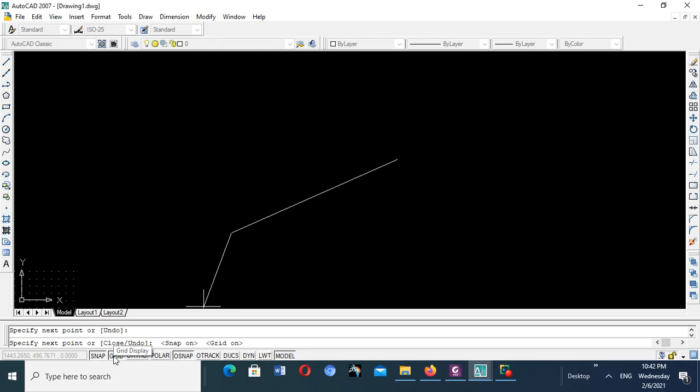Then after the coordinate display, there is what we call the status bar, which is this one. You know, snap on, grid on, off. See, grid — there's a grid already there, activated, grid deactivated, ortho on, ortho off. If you put ortho on, you can only draw horizontal and vertical lines. If you put ortho off, you can draw a line at any inclination.

Then polar, when you want to draw a line using angle as one of the parameters of description. Then osnap helps you to identify a point easily. When osnap is off, it doesn't tell you where you are, but when osnap is on, it approximates the position where you are. So it must be on. Then there's otrack, dynamic, lineweight, model — all those are your status bar items.

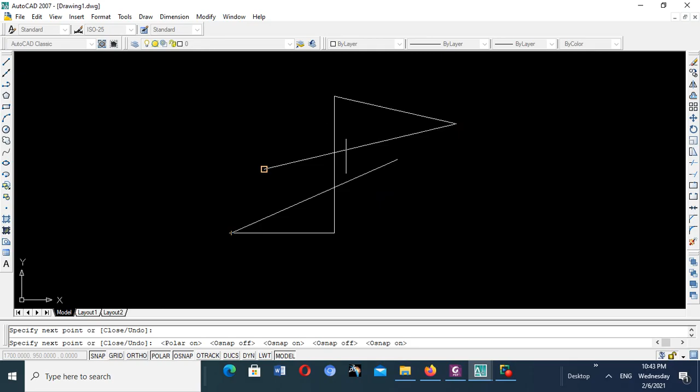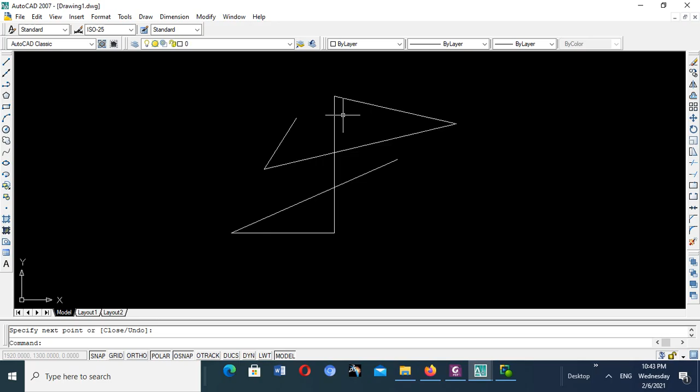Then we want to give it a start, right? So if I highlight all this using my mouse — and by the way, if you don't have a mouse, you won't be able to draw, you'll have difficulties. So on your mouse, remember there's a left click button, a right click button, and a middle button. I think you must know that. The middle one is a wheel, a small little wheel. If you roll it forwards and backwards, it zooms in and out. Then if you click your right mouse, it brings up the menu of the command you have given.

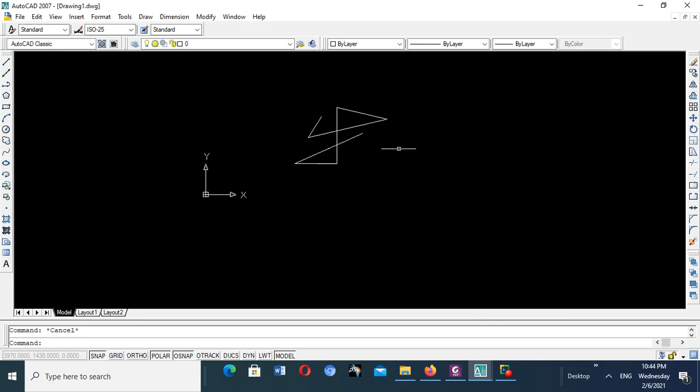If you go to your left mouse, you choose what has been displayed, one of the attributes of the displayed menu. So left click, right click - you should know these. If I want to highlight lines to delete them, I highlight using the left click button, then click delete, or right click and the menu comes up. This time it's not there, so I click delete from the keyboard.

So let's give it a try. I go to line command using the left click button, then click here, already in the command line or on the taskbar. It's already asking me for the command line. It asks for the first point, so I just click the first point using the UCS.

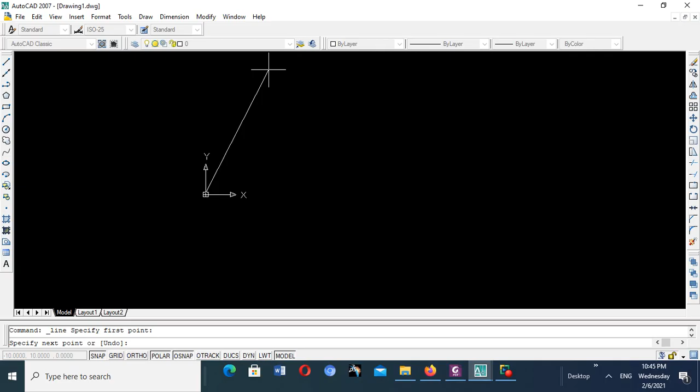It's not exactly 100. If I click ortho on, see my line - if I move my mouse, my line goes moving throughout the canvas of 360 degrees. But if I click ortho on, it locks to either horizontal or vertical line.

Sometimes there's a situation where you require that, right? So what do I do now? If I want to draw a horizontal line on the right side, I move my cursor so it's on the horizontal line on the right side, click, and write the length. I write 100 - you look on the command taskbar, you find if I write 100 and press enter...

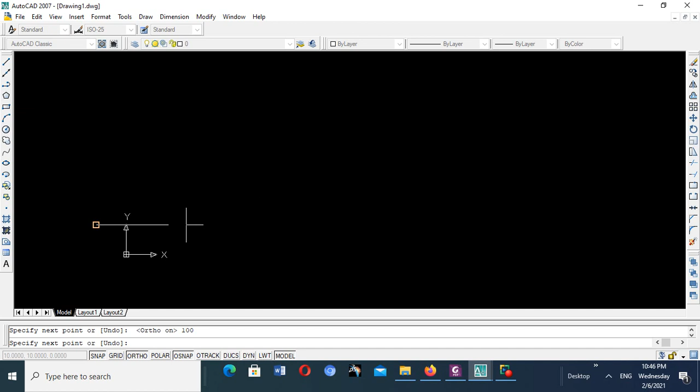It is now drawn as a 100mm line. If I zoom it, it will be exactly like that. If I incline it vertically and write again, say 200, it will draw a line vertically upwards 200, and I press enter. There is my 200 line.

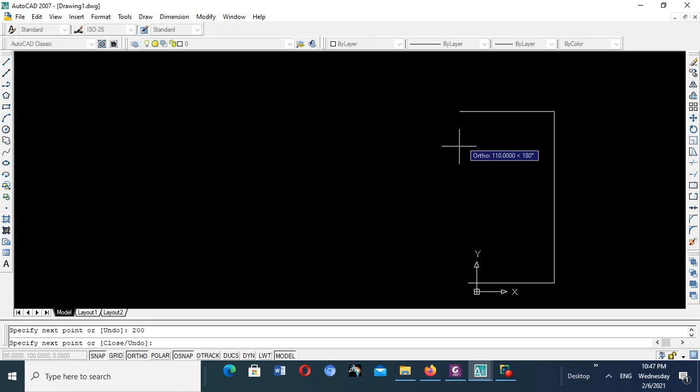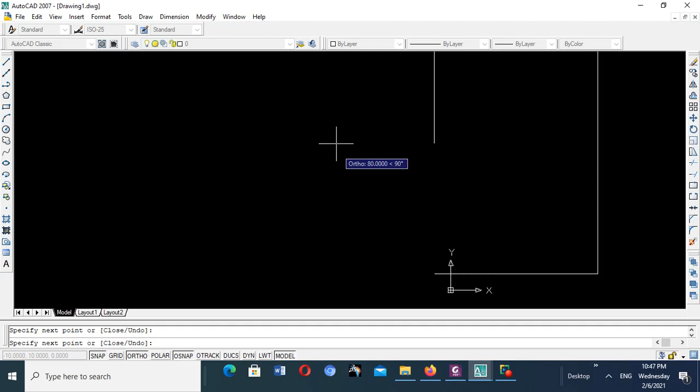For moving it up and down, to zoom for clarity, I just roll the middle button. Then if I incline my cursor to the left side and write 100 and enter, my line goes again. Then if I pick where I started and click again with the left mouse button, it joins all the lines to that start point.

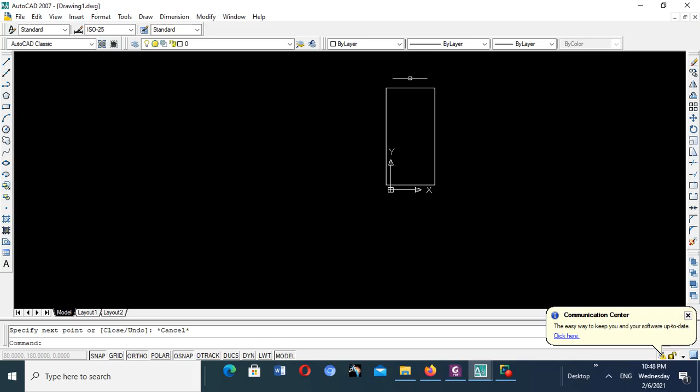If I click escape, the line command is left, and then I have a rectangle like this - very easy. So if I want to delete that, I can highlight it using the left mouse button, drag while continuously pressing the left mouse button, cover the whole model, then click delete, and it's gone.

Let's say I want to draw an inclined line - we call it a polar line. So if I go to line and click anywhere, this is what we call the graphic area. This black area is where you do your drawing. I won't speak much about the graphic area. This is your graphic area, and this is your UCS, your user coordinate system.

Your start point - this is your 0,0. You can shift it to where you want, you can incline it. You will see when you are using it - we might incline it or shift it to a certain point where that point becomes our 0. And if we incline, we are now drawing shapes at certain angles according to our requirements.

So we want to try and practice an inclined line. You click on the line command, then on our taskbar it tells us to specify the first point. So I can click here on the origin, because it's now ortho on - it's either horizontal or vertical. So I click ortho off.

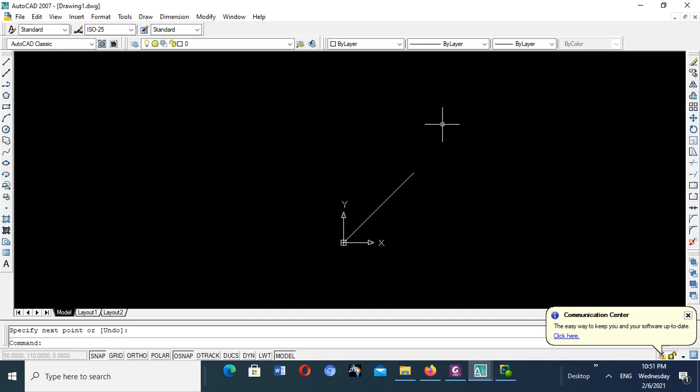And there you are - your 45-degree line has been drawn. If you right click and press enter, the command is stopped, and there is your line. Even if you try to dimension that line, you go to dimension, pick the inclined line, pick the beginning and end - you see the dimension there is 100.

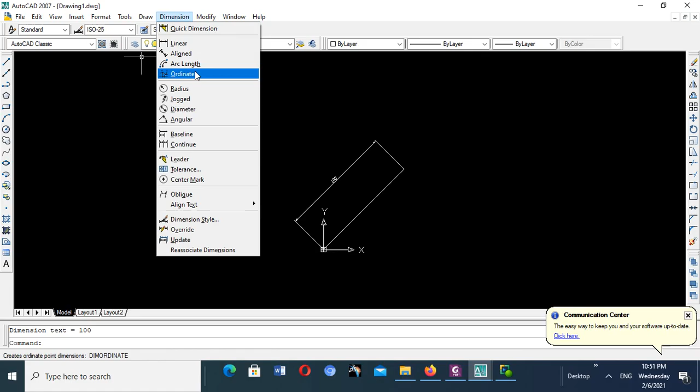Even if you are going to measure the angle, just give it a try - you want to dimension angular, dimension this and that. No, it doesn't work unless there was a line. Let's put a horizontal line there. Right, good.

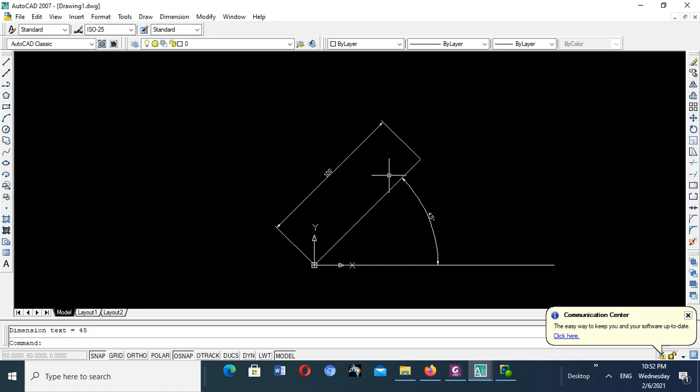You just want to cross check with angular measurement. So we want to click this and measure it at 45 degrees. So we managed to draw a polar line. I just wanted to make sure.

You are with me that we have successfully drawn a polar line. So with that, we can now do more work. Now we know how to draw a horizontal line and a vertical line, all line work you can now practice. I start from there, then go to the origin, the line command is there, then I go to origin, I press, then I want to go in that direction, 100.

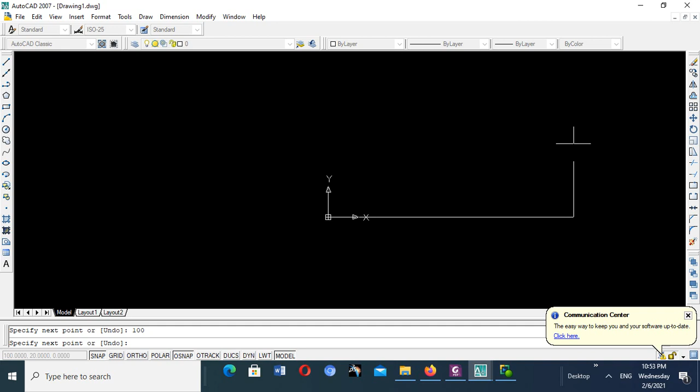Then I want to go up in the direction 50. Then I want to go backwards in the direction 10. Then I want to create a polar line which is inclined almost in that position.

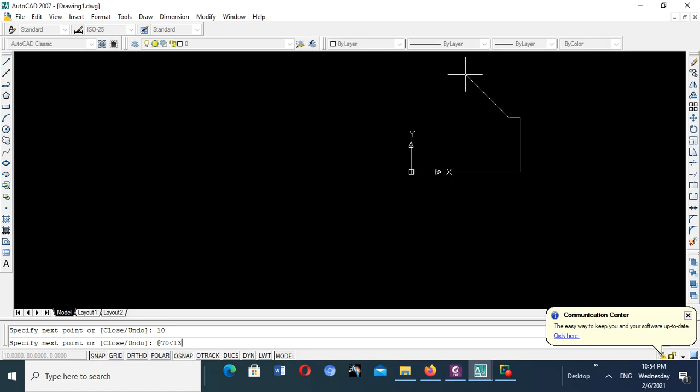If I know the angle of inclination and the length of the line, I can draw the polar line. For example, let's say my line length is 70, so I press shift at the rate 70. Then the angle of inclination, let's say it is 135. I go shift, smaller than, 135. Then I press enter. See, there is my line.

Then I want to draw another polar line, maybe inclined in this direction. So I must know the angle of the line. Let's say the magnitude of the line is again 70, so I press at the rate 70. And for the angle, I go shift smaller than.

When we consider an angle, you must consider it the standard way, where the horizontal line is your 0. So it is going past 180, slightly more than 180. I say 45, so it will be 225. So I go 225. Enter. There is your line.

Then maybe it went horizontal by 10, so I go 10, enter. Then maybe it went down. My ortho is off, now I can put ortho on because I want to create a vertical line. It goes down by 50. Then I can go back to the origin.

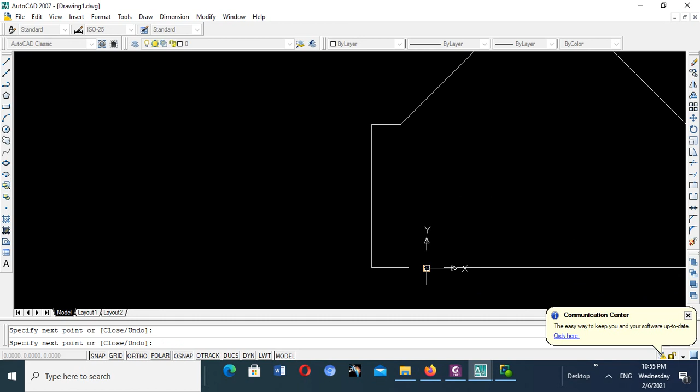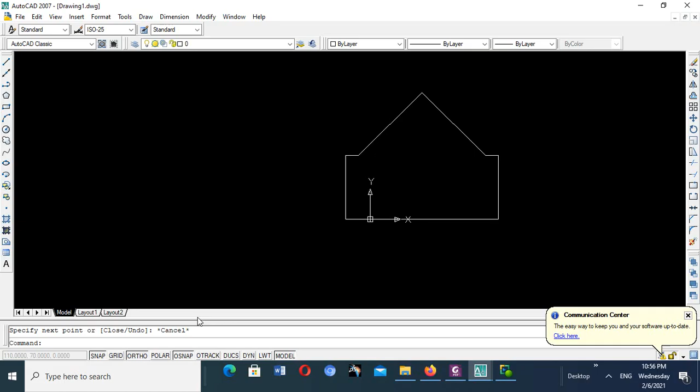Then if I want to quit the drawing, I can press escape or press enter. And then there is my drawing. I've used both the line command, where I knew the coordinates so I could use auto coordinates, and also drawn using a polar line where I know the angle of the line and its length. So if I click the start point, then mention the length of the line and also its angle, I end up with a shape like that.

With that, you guys should be able to draw any shape which has straight lines, either horizontal or inclined. Then with that practice, I want to bring some more extra knowledge concerning modification of lines.

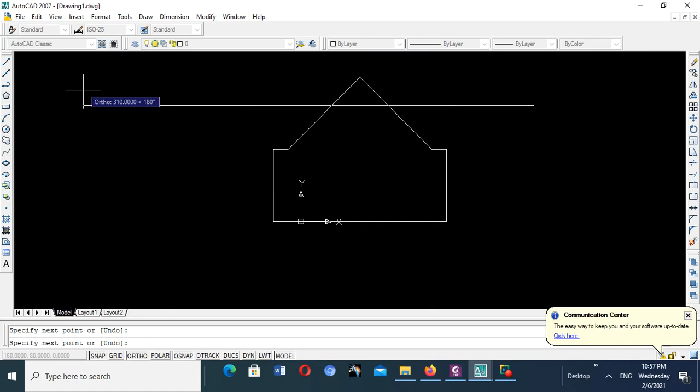Let's say I've got a shape or a line which is crossing over there. I've drawn that line, I escape it, then I draw another line. I'm just drawing random lines. I remove ortho and end it there. Then I can right click and enter, or press escape.

So I want to teach you the trim command, how it works. Let's say I want to trim this - this is my boundary for the trimming. The upper part of this inclined line I want to trim off, this upper part also I want to trim off, and also this line I want to trim off, so that I just remain with the part coming from that side, going to that junction, straight this way, and down. That I want to remove by the modification called trim.

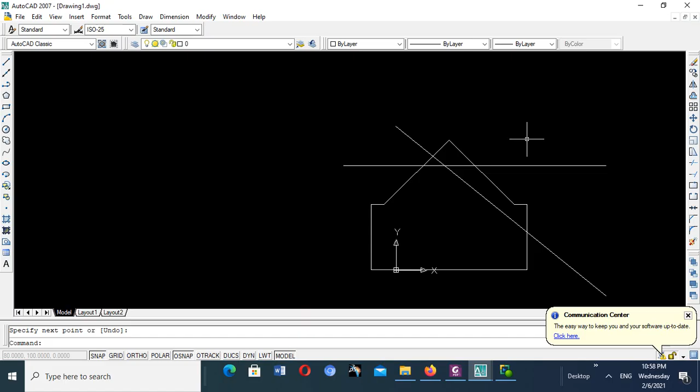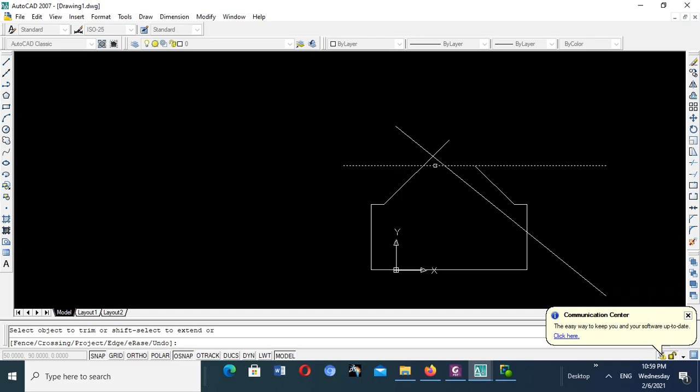So I go and click on the trim command, and it asks me to select cutting edges. So this is my cutting edge. Then it says, now that this is your cutting edge, tell us the lines you want to trim. So I say enter, then I click this line. I'm already cutting using this cutting edge, and I trim. Let's turn on snap - okay fine, my snap is on. Yeah fine, and then I go to this line.

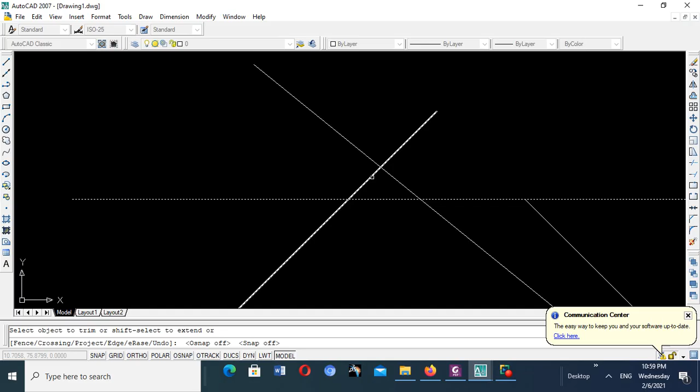I've removed this snap to make it more flexible, because I want to snap the nearest point. If I click again, it's gone. I click that one, it's gone. I click, that is the boundary. If I click this one, it does not go because it's not associated to the boundary, right?

I escape. Let's say I want to remove now this part and that part. So what do I use as my boundary? This one, I use this as my boundary. So I go to trim, then I select the cutting edge. This is my cutting edge. I can also select another cutting edge. This is my cutting edge.

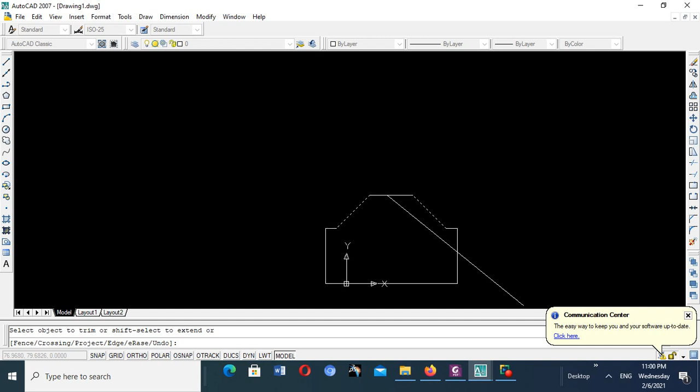Then I say enter. Then what do I want to trim off? I want to trim that, because they're on my cutting edge. Then I press escape. This one I might not want to trim, I just want to delete it. So I highlight it using the right mouse button, then I delete it, and there is your shape.

So you have learned the line command, the polar line which is inclined, and you have learned the trim command today. You must apply that. I want to introduce you to some few more commands.

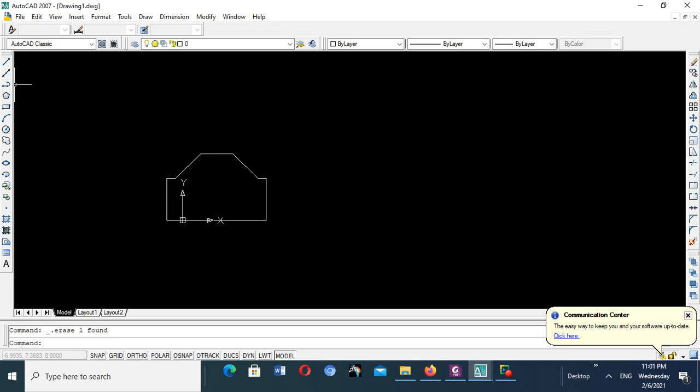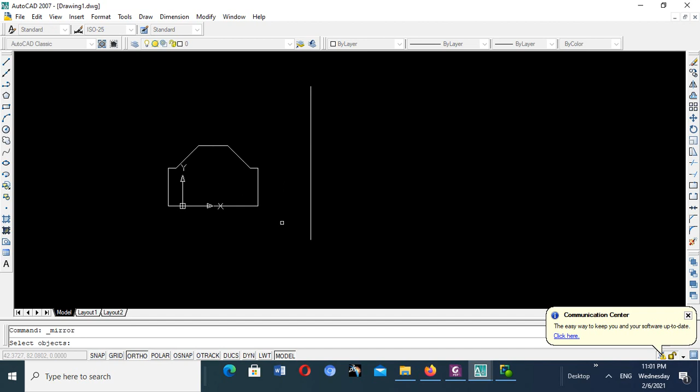For example, mirror. If I put a line here and draw it, ortho on, draw it like this, then I want to mirror this model using this mirror line. So I select mirror, then I select all this body, then I say enter.

Then it says specify first point of mirror. See, it's not specifying a point, so I go to snap on, so that it's easy to pick a point. There you go, snap, you see it's already coming.

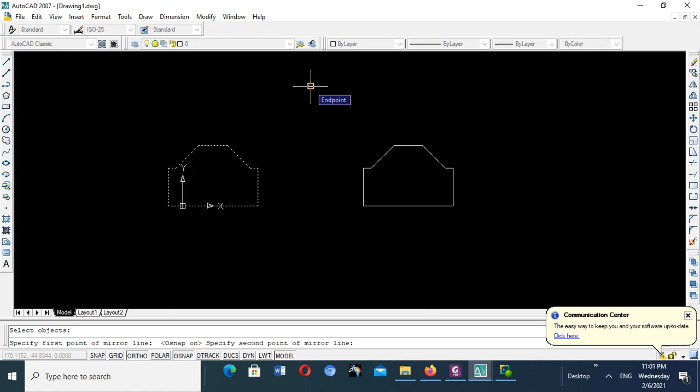There is a second point of mirror. It asks you, do you want to erase the source object? This is the source object. If you want to erase it, you just say yes. If you don't want to erase it, you just say no. Defaultly, it picks no, so if you agree with the default, you just leave it, and you say enter. There is your mirror.

So you realize by just one drawing, you can now produce another drawing just by mirroring. That you can't do in your manual drawing.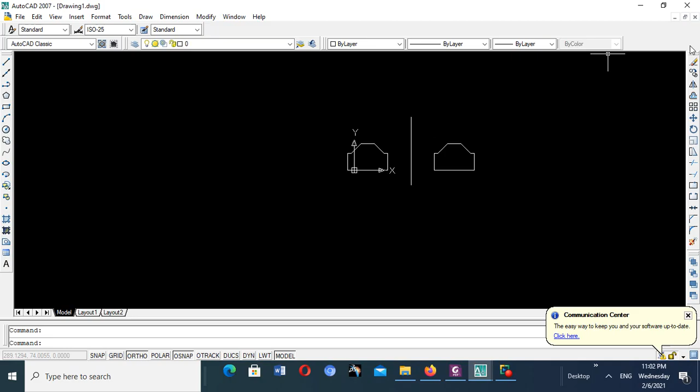Check copy, yes, copy modification. Copy, select objects to copy. Select this whole thing, then I say enter. Specify base point, this is the base point.

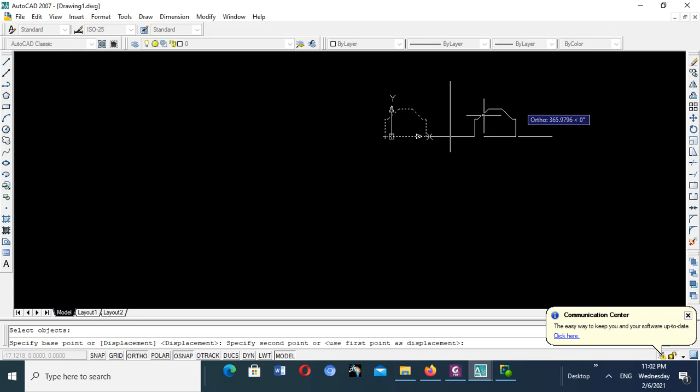Then there is specify second point, where I want to copy it. If I remove ortho on, I can put it on any point. Copy there, copy there, copy there, copy there. It's nice, man, copy there.

Then if I'm done, I just right click and then press enter using the left click. So we've learned copy, we've learned mirror, we want to learn offset, right? So let us press offset.

We specify offset distance, so we say 100, enter. Select object to offset, then this is the object to offset. Select point on side to offset, this is the point on side to offset. Easy, right? And it's very conversational, some of the things you just go by the conversation.

Then there is this modification called the array. We'll do this later. I want you to practice what you have already learned. Array, we'll do that later.

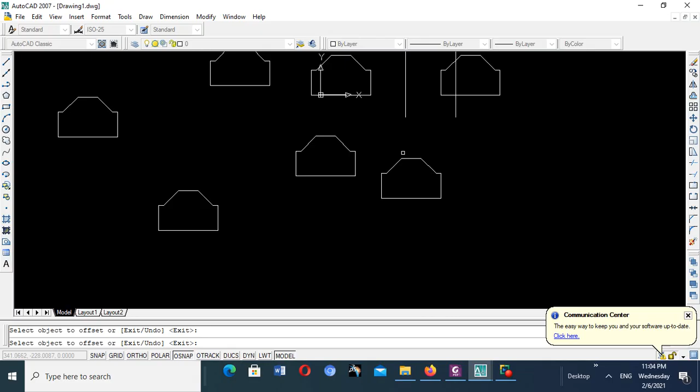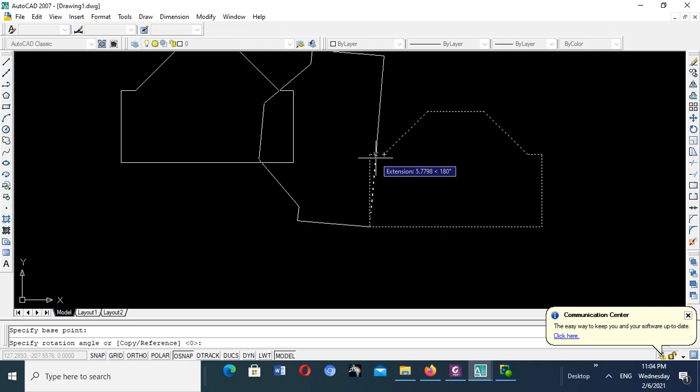Offset we've done. Rotate: if you want to rotate this feature, for example, this—escape, I highlighted this, then I say rotate. It says select a base point, the rotation point. It's already rotating. By moving the mouse I can rotate, or by writing the angle here I can rotate. So let's say I want to rotate it 90 degrees, so I just write here 90 degrees. Enter, it is rotated, right?

Scale, you can scale it. Stretch it. So some of these things you can practice even before I introduce you to them.

So with this, I will want you to practice drawing some shapes. I will try and send you some shapes which are very simple on your group email, and then you try and practice them. When you've done that, I will send you another tutorial to draw more complex lines, complex models, which involves arcs and tangents and curves.

And after we've done that, we do edging. After that, we do some dimensioning. After we've done that, we do some 3D drawings, and after that we do more and more until we finish. With that, I want to thank you for listening.